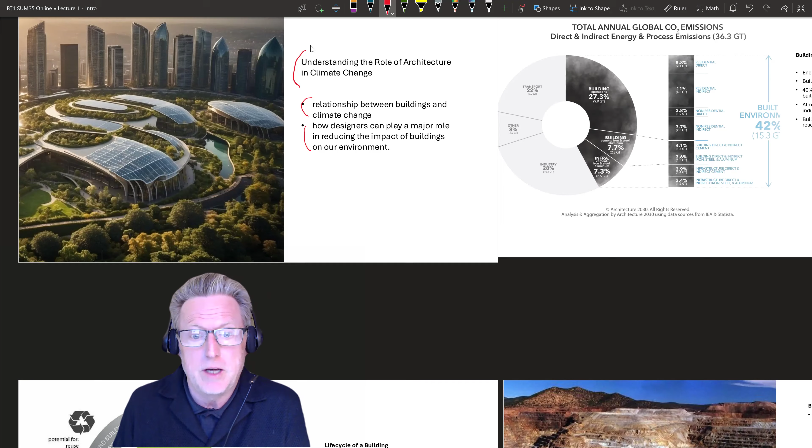So we're here to understand the role of architecture in climate change. That's the role in contributing to the problem of climate change, or carbon output, and therefore carbon output's effect on climate change. We're going to talk about the relationship of the building industry to climate change. And then, how designers and anyone in the built industry, in the construction industry, in the industry of making the built environment, play a major role in helping to reduce the deleterious effects of the construction industry on the environment and the climate.

Before I jump into some of those other slides, I do want to start with this one right here, because it points to the life of a building and how the various phases of it are part of the role it plays in carbon output. We often think of a building's contribution to carbon output as its operation, in the sense of how do I run it efficiently, how can I have it use less energy and therefore burn less carbon. But the fact of the matter is it goes beyond that.

It starts simply with the production of the materials that will be used to build the building. So the raw materials, the manufacturing and the transportation of those materials so that they can arrive on a building site from a place like this, where quite literally they're harvesting raw materials out of the earth that will be made into building structure, enclosure, or any other type of building element we use to fabricate a building.

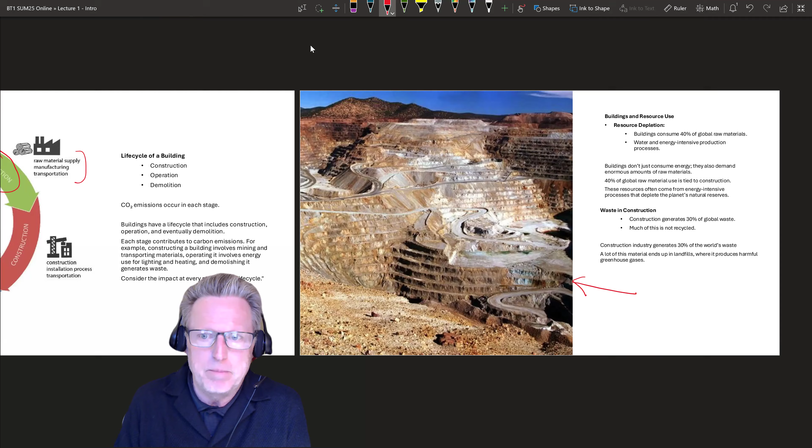And that moves then into the construction phase. That is then all the energy that is used to fabricate a building, a significant amount of waste that is created by that, but also the energy necessary to make it.

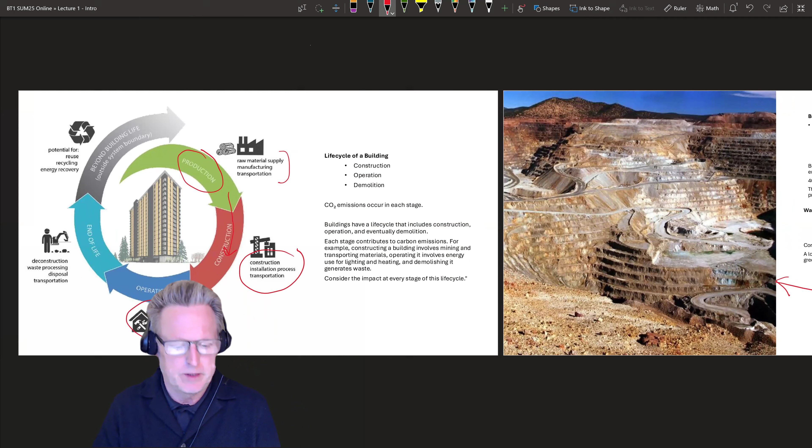And then the part we often think about is the maintenance, repair, replacement, refurbishing, and just the general operation of the building while it's in use. That may not include a significant amount of additional materials — it might not include bringing back aspects of production. Certainly when you're repairing, replacing, and refurbishing you might be, but not at that scale. The operation really has to do with the energy use of the occupation of the building.

And then we have the end of life, which is what we do with a building when it's no longer in use. The traditional way of the industries of the built environment, including real estate speculation and development, is you tear that building down and all that stuff goes into a landfill. And as it does so, you're releasing carbon that has been sitting in that material out into the environment. So these four phases of a building's life really can impact that.

There is conversation, and we'll talk about this a little more later, about what happens at the end of life — how can we either reuse buildings so there isn't an end of life, or how can we dismantle them in a way that allows us to reuse their materials, to save the production of new materials and all the carbon that's created there, and not just carbon but cost, and continue to use the materials that we have.

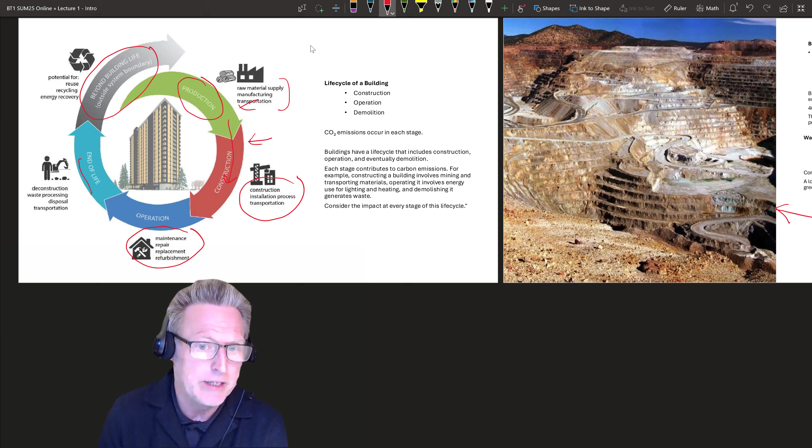If we jump over here and talk about that initial step of getting building resources, it's important to note, on a global scale, that buildings consume 40% of raw materials. So just under half of all the raw materials we pull from the earth go towards buildings. That term also includes some infrastructure, but it's really buildings.

They don't just consume energy, but they also demand a significant amount of natural resources. The steel, the concrete, the iron, the aluminum, all those things we use to build buildings require raw materials. This is an energy intensive process, labor intensive process, and it really depletes our resources. As we use energy to create those materials, it contributes to carbon output and to climate change.

Waste is a huge issue in the building industry, the construction industry - not to tag them with this, but it's an industry issue for all those involved in the built environment. 30% of global waste comes from the fabrication of buildings and other parts of the built environment, and the vast majority of that is not recycled. So to understand how much of the natural resources we extract from the earth, and the amount of waste, these are really kind of crucial elements here.

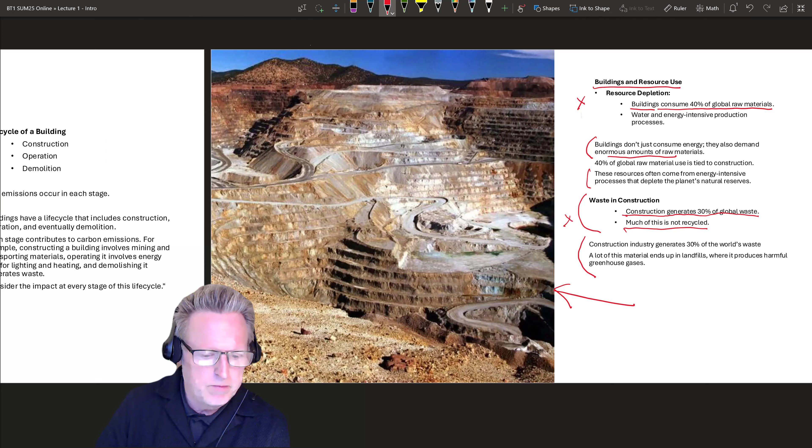For our purposes, we're going to go over some more statistics about the building industry's role in creating or contributing to climate change through carbon output. If you look at all global emissions - and this is a really fantastic website I'll mark here, Architecture 2030, you really should visit it and check it out - that's who produced these graphics.

The total CO2 emissions, global emissions, can be roughly divided into the categories you see here: the shaded ones - buildings, which is buildings operations, buildings materials, and then infrastructure, roads and things like that. They contribute just about 42% of global emissions. Given that we produce just over 40% of the global emissions, it tells you that changes in the way we build and design buildings can have a tremendous, positive effect on CO2 emissions.

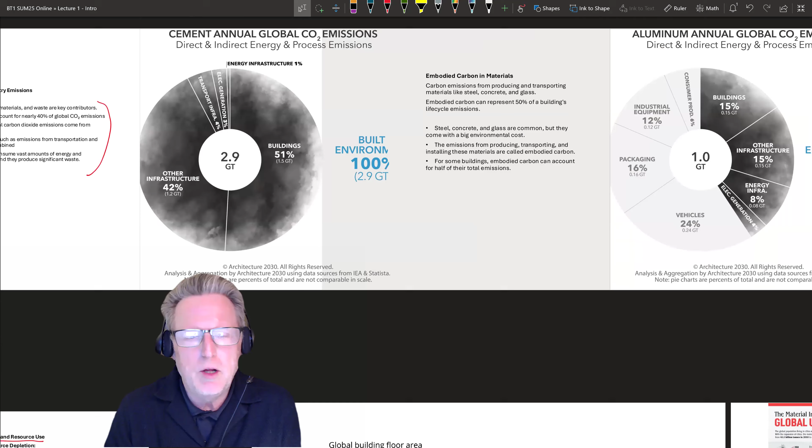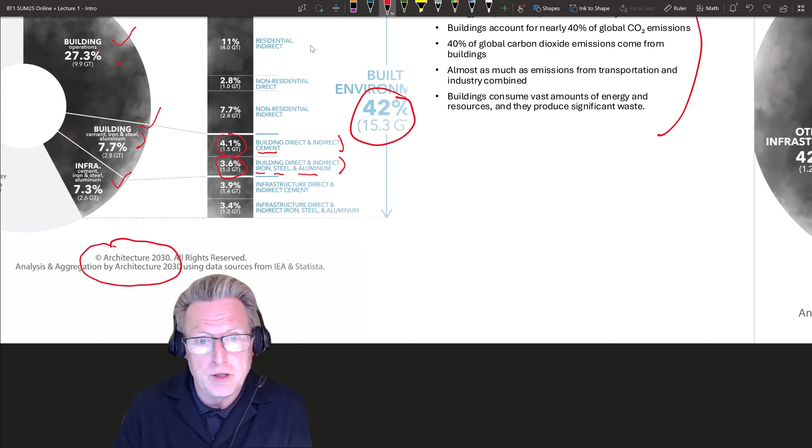This basically restates what I'm pointing out in the diagram. If we set aside the operations and just look at the construction of a building and its materials, you'll see that cement produces a significant portion of it, more than half of the overall number, and more than iron, steel, and aluminum combined. We want to look at those materials because it really starts to impact the choices you'll be making as someone in the construction industry, when designing or constructing a building - what materials you're going to use.

So cement is one of the real significant producers of CO2. When we talk about cement, we want to be clear we're talking about the material that is an additive to concrete. We all know concrete is not cement - cement is used to make concrete. So concrete itself, people often say concrete's the problem, and yeah, it is a problem, but it's the cement within concrete. It's not the aggregate, it's not the addition of water, it's not the other additives we put in for high strength. It's the cement, and the cement is what we're pulling from the earth.

It is a raw material that you have to excavate and pull from the earth, and as you do that, it's incredibly labor and energy intensive. Buildings utilize half of the cement - in the overall use of cement, buildings are producing overall half of the CO2 from that use. So if this is all the CO2 being created by the use of concrete, buildings are producing half of that. So the construction, the use of concrete in buildings worldwide - being clear, this is worldwide - is our buildings.

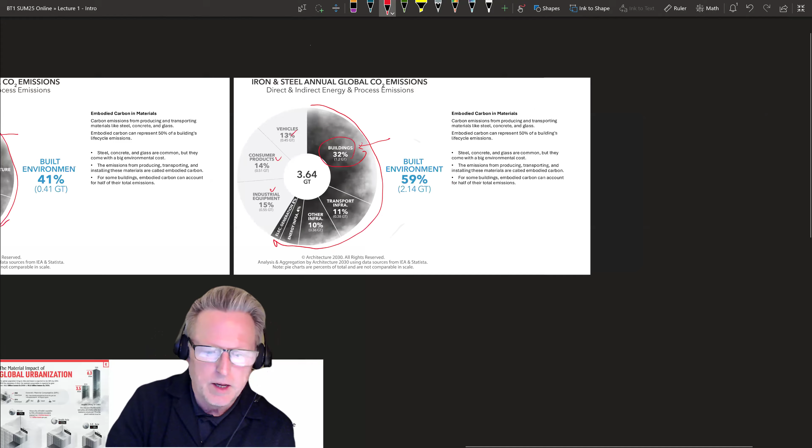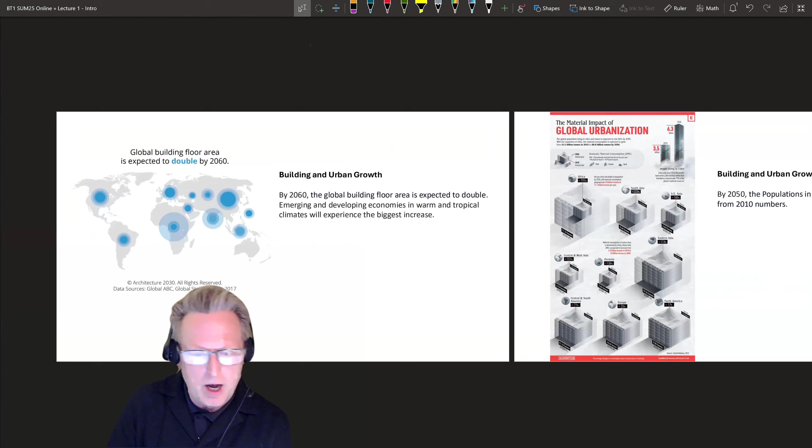So material use is a big deal, and that's really a contributor. There's another contributor I want to talk about too, one that the building industry really can't do much about other than respond to in as judicious a way as possible: building growth due to population increases or population movements to urban areas.

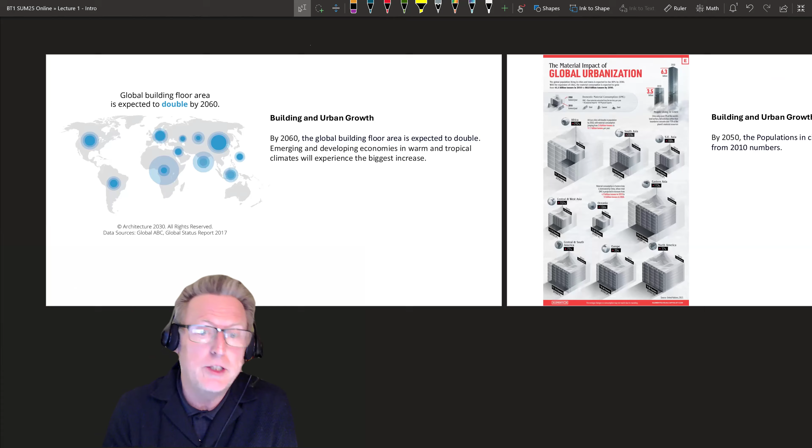Globally, I know I told you about the United States, but globally, the overall square foot area that we need throughout the globe will double by 2060. The population growth and the movement from populations to urban areas will necessitate the doubling of the square footage we have now. In the United States, that's not going to be the case, but the rest of the world, or at least a lot of the rest of the world, will be seeing that growth.

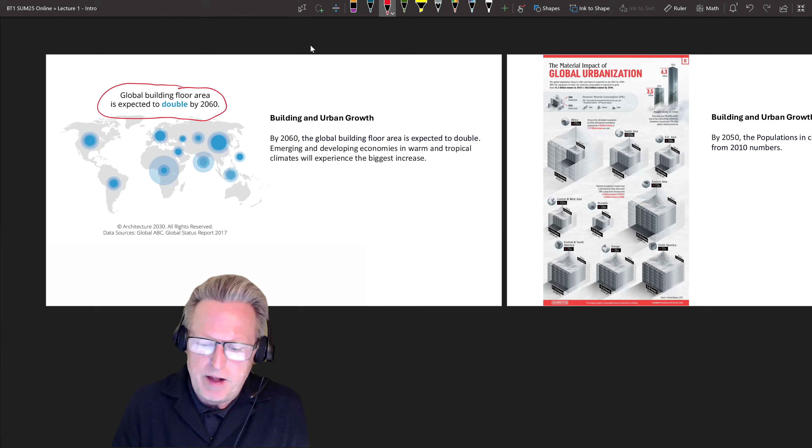Emerging and developing countries in warm climates will see those biggest growths. There are a couple things there. You see a lot of big construction and design firms making sure they have presence in those areas because there's a market to do business. But also they're trying to figure out how to do it in a way that meets their aspirations for ethical practices as it relates to construction and design and as it relates to carbon output.

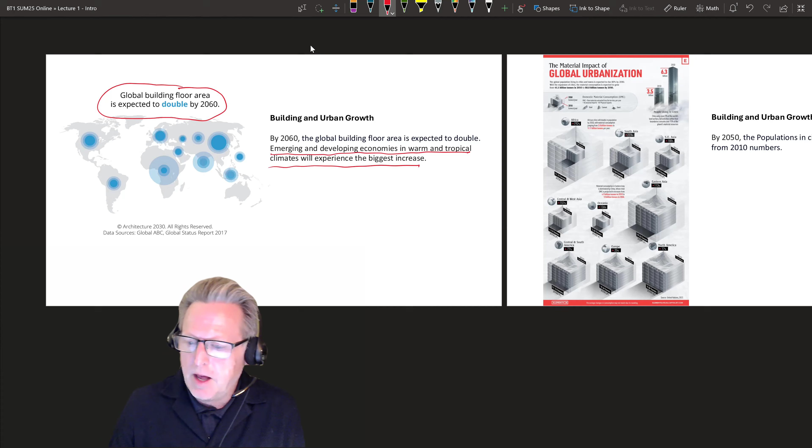As I mentioned, it's urban growth that probably is the main driver of that change. It's, of course, demographic growth—their populations are simply getting bigger. But also they're moving from rural areas into urbanized areas, and because of that, they're building more and more larger and larger cities. Cities are expanding. That is not the case in the United States. We don't think that way in the United States, but largely the rest of the world does. And so by 2050, population in cities is expected to double from what they were in 2010.

That means we need a lot more resources. This is a breakdown by country, and you can see that North America is the lowest, 17%. Africa, close to 800% increase. South Asia, over 200%. So this is what we're seeing in terms of worldwide global growth and where square footage will have to be built.

New buildings will have to be built. Old buildings will have to be renovated or torn down. Existing buildings will have to be expanded. And as we do that, we want to produce that new square footage in ways that are ethically sound as it relates to CO2 emissions and the contributions of the building industry to climate change.

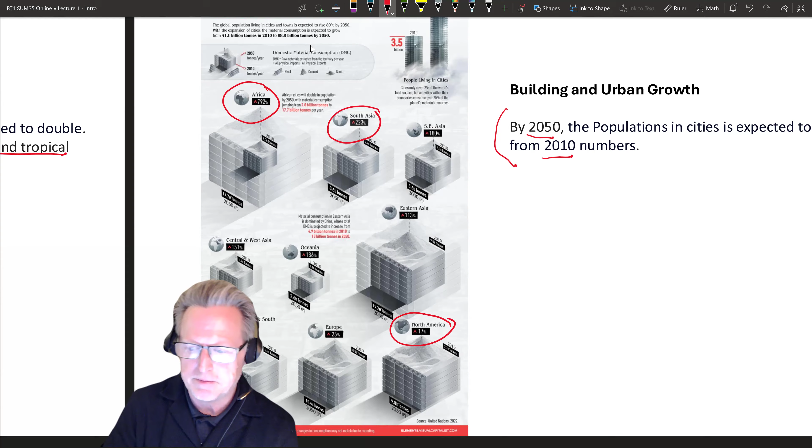So that wraps it up for this little mini lecture. Our next will cover the steps that we're taking as industries in terms of design to address some of these concerns. Thanks so much.